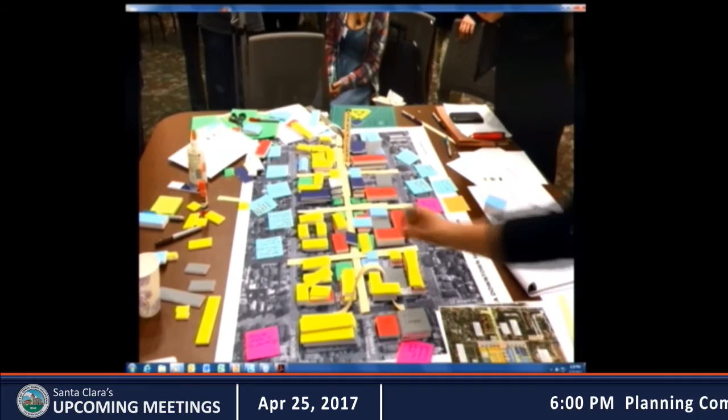I think with what Casey and I and our group feel is that this is an old soul here, and the footprint is already there. I think we bring it up to date, but we take a little bit from the 1860s, back from the history of this city as one of the oldest in California, with history of every decade. We sprinkle it in a little bit, and that's what makes it unique. That's the key. This is Santa Clara, and I think we could all wrap our arms around this and really move forward.

So you get just a little taste. But what basically was happening is the pieces are movable, right? There's paper, scissors, everything. So people took advantage of that to help construct what they were talking about or write notes. They have pads to write notes on, to do whatever it takes to say, here's what we're thinking. So we took all of that and started to craft a preferred plan, which is on the tables.

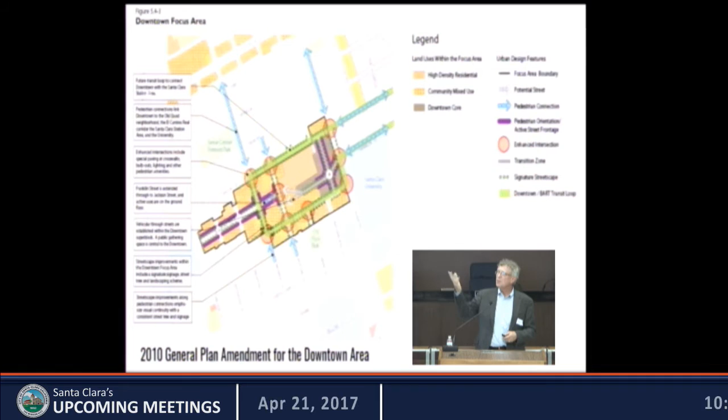So before we get into reviewing that plan, I wanted to look back a little bit at a couple of other items which also help inform what we're all doing. The first is that the general plan and its update from 2010, or amendment, shows what has been coming forth, which is to make Franklin into some sort of main street that ties in with the university. That came up again and again.

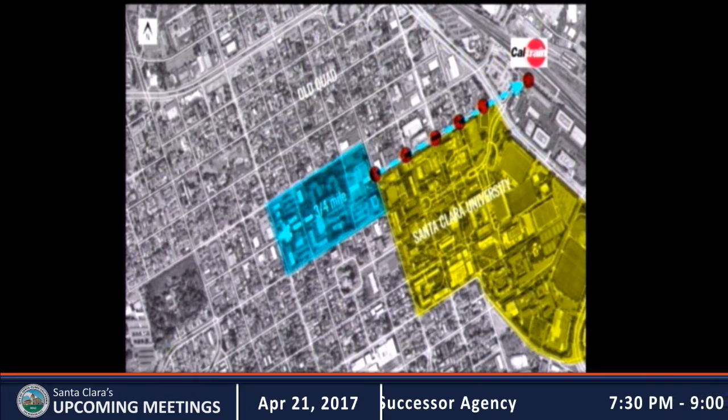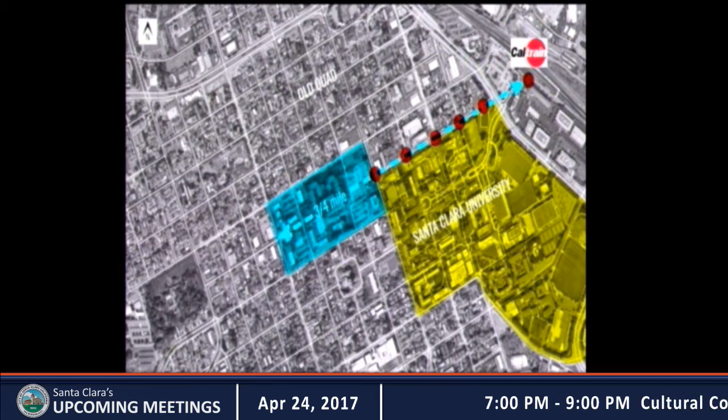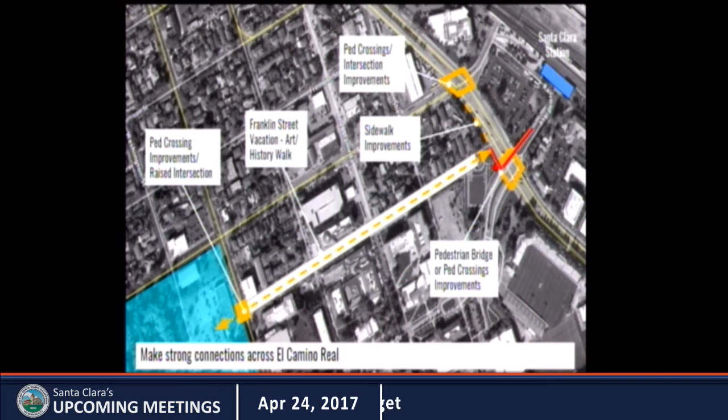So when we look at it in a bigger sense, all the way from the Caltrain and future BART station to Monroe is about three-quarters of a mile, a nice walkable distance, making the Santa Clara University and the super block of downtown, as it's been called, from Lafayette to Monroe, work together. There are certain things happening all the way from Lafayette with the university heading over to El Camino Real and to the transit center.

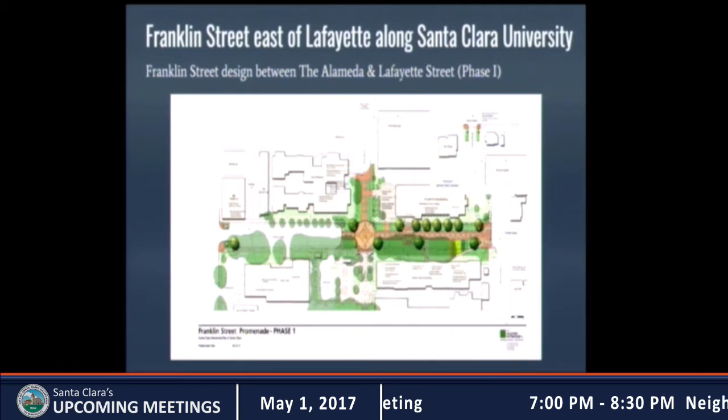So along the way, since we started, there's been some work by the university on Franklin Street improvements. Here the promenade is shown, and the street on the far right is Alviso, and the one in the middle is Alameda. The first phase of this, which I understand might be constructed starting this summer, is that first block, and then the second phase would go to Lafayette from the Alameda.

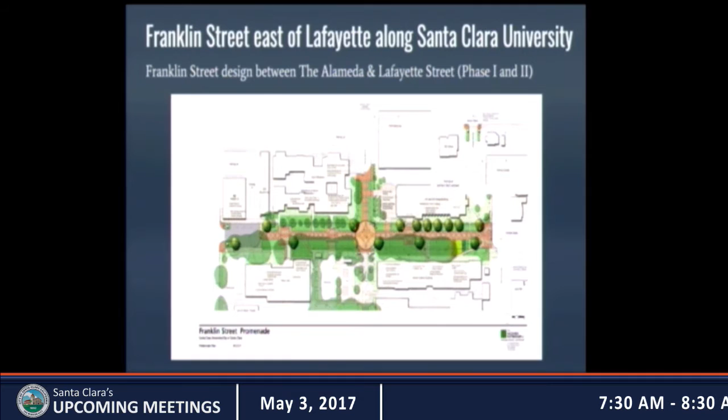So you can see there's a lot of improvements planned or thought about, including intersections and even a history idea at the intersections, and then some sort of gateway at Lafayette, sort of welcoming you in and out from downtown as part of the downtown. This was actually talked about a lot in some of the first meetings and kept being reiterated in recent meetings. And of course, there are also projects underway.

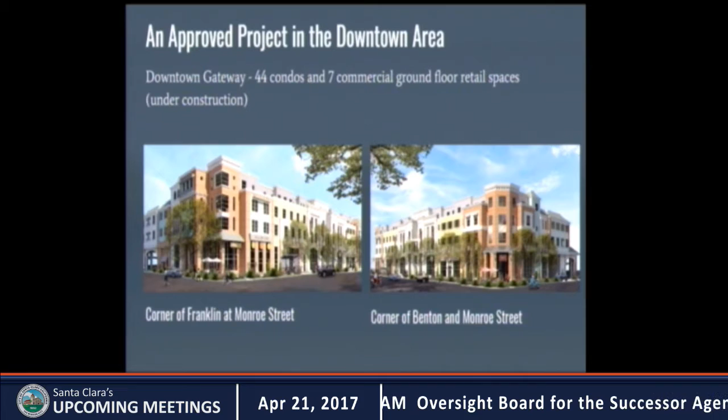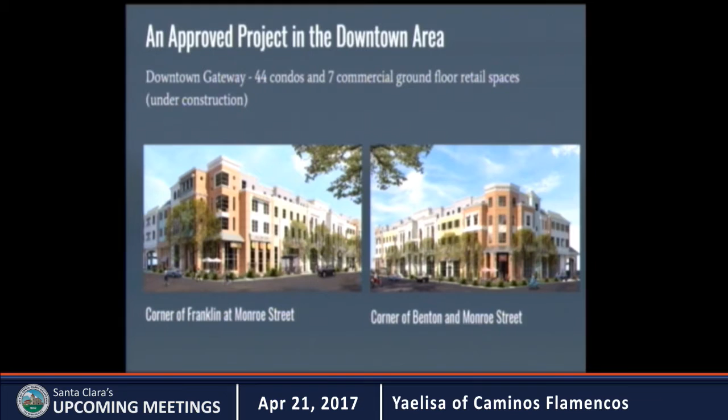Here's the downtown gateway at the corner of Franklin and Monroe, and a picture from Monroe Street at that corner. So you can see there are already things happening, and what's important about a plan like this is nothing stops. We can make it a work in progress, and in order to see what's next, one of the things that comes out of something like tonight is what kind of phasing there should be if this is the preferred plan, and what should be the next steps. So that's what we'll do at the very end.

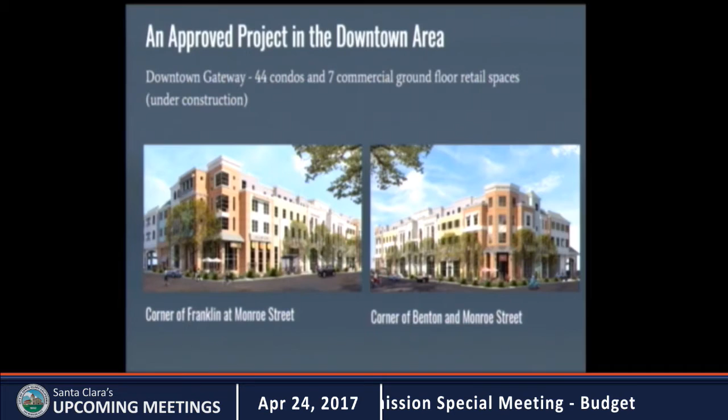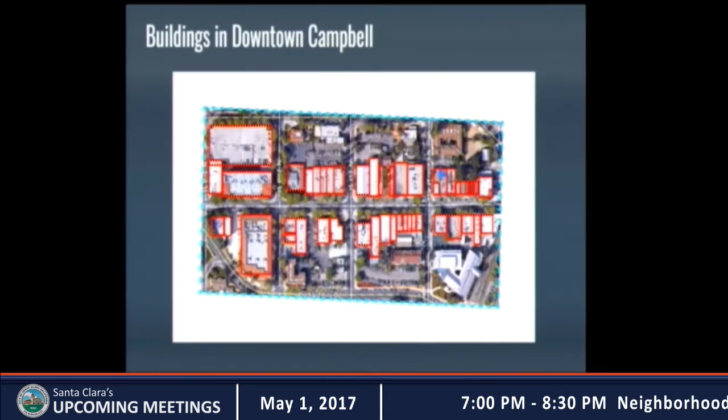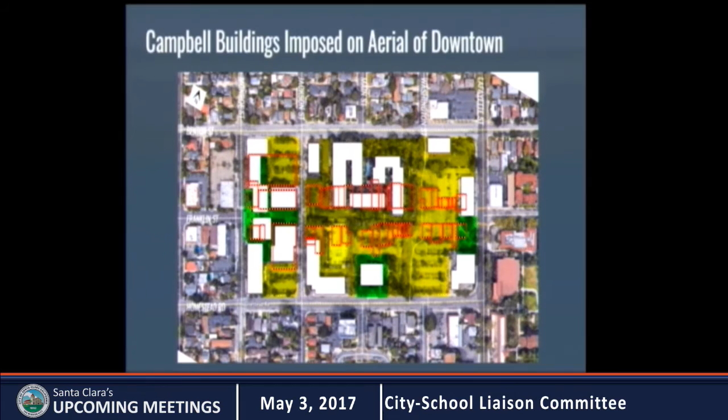We were also looking at, in the past, and you may have seen this before since I presented it a few times ago, downtown Campbell as an example of another downtown that has a nice grain of urban pattern. When you look at the buildings in downtown Campbell and outline them, then cut and paste those outlines right onto the super block, you'll see them in red. The pattern actually fits quite nicely on the super block. This was kind of an amazing coincidence, or maybe it's not. This is actually a pattern that used to be there and still exists in Campbell, and if we were able to compare them, you'd see you could fit it if you wanted to bring it back.

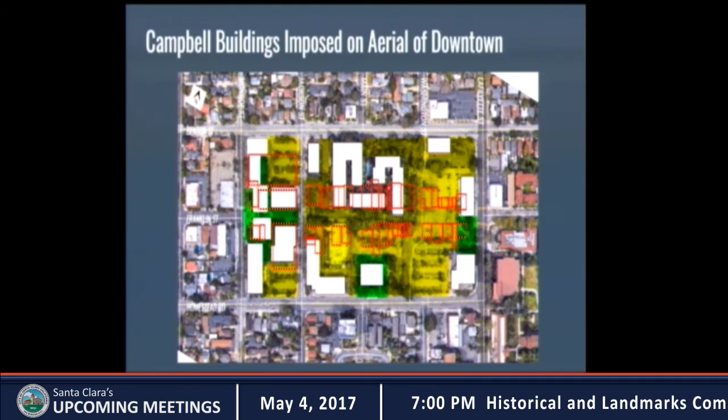So some of the principles we've gathered from our conversations in past workshops, and there's been quite a few - this is number 7. There's defining a flexible plan boundary, promoting the local flavor and unique vibe of this place, respecting the historical heritage and character, incorporating a pedestrian-oriented spine along Franklin Street, and addressing flexibility in uses, densities, and site relationships. These are all big topics that came up time and time again, and we can keep talking about how they're implemented in this plan and the best way to make these things a reality.

Oh, and there's 5 more: maximizing the collaboration among the city, Santa Clara University, and other stakeholders; including a diversity of uses that will activate downtown; promoting the arts and the arts community as a theme; enhancing transit, pedestrian and bicycle access and other forms of access; and promoting a balanced scale of development that achieves a density for success. So today we're going to have a chance to explore some of these principles, and maybe they've shifted a little bit, but we'll talk about what these mean to us now.

At our last meeting, we had looked at 3 alternatives: Alternative A that focused on infill, Alternative B that looked at a meandering Main Street, and Alternative C that's restoring the downtown grid. All 3 of these alternatives are at every table, so they're just for reference of what we had worked on in the past. But I wanted to go over them and show you.

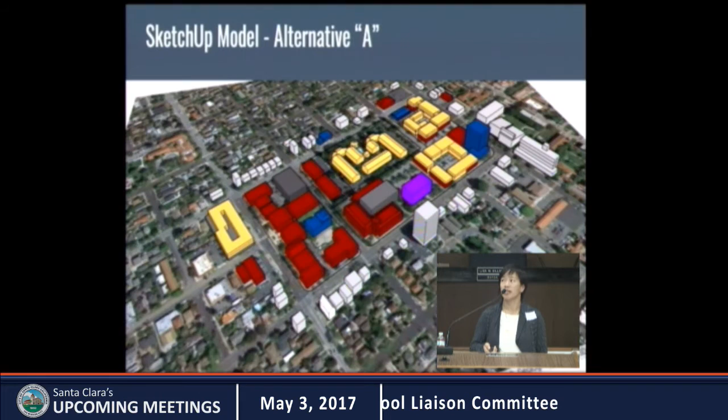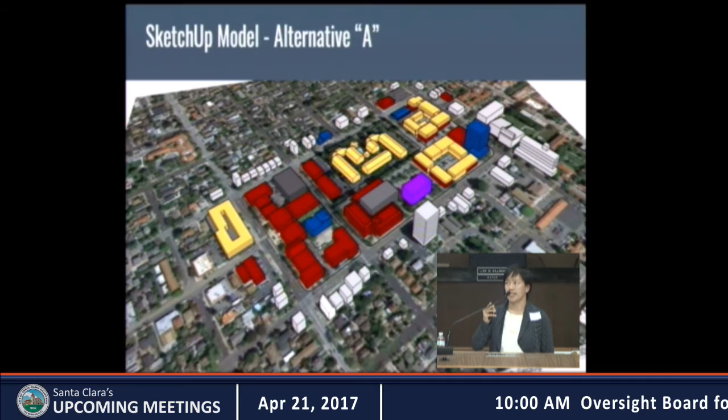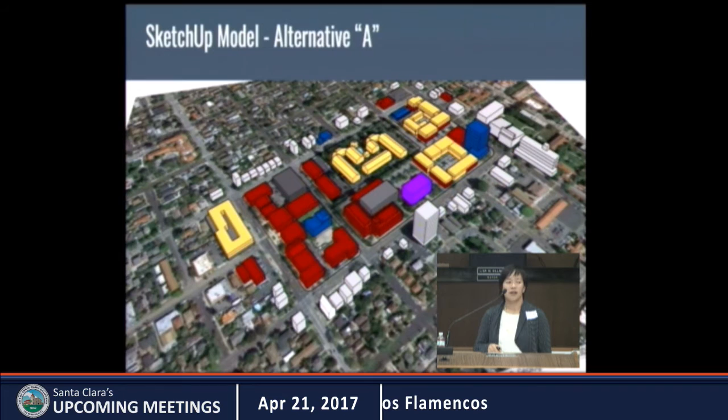We made 3-dimensional models of these so we can see how they work. With Alternative A, really focusing on infill, we realized some of the larger parcels needed to be addressed - there are some existing parcels that are either city-owned, though most of them are privately owned. So this is the most conservative approach, looking at the infill of really the areas along Lafayette. In model form, this is what it looked like at the discussion in February.

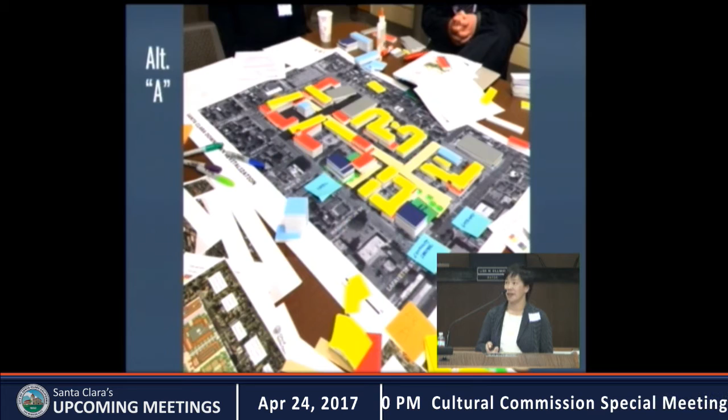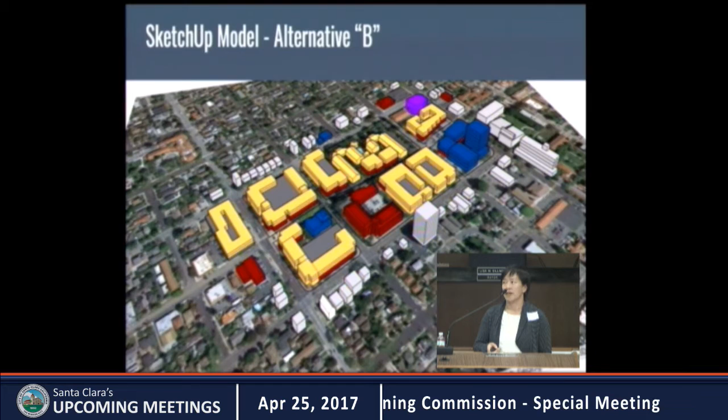For Alternative B, this looked at trying to get Franklin Street to go through, maybe not in a straight manner but as a meandering curve, really to respect some of the existing buildings that are still there. This is what it looked like when we were working on it in February.

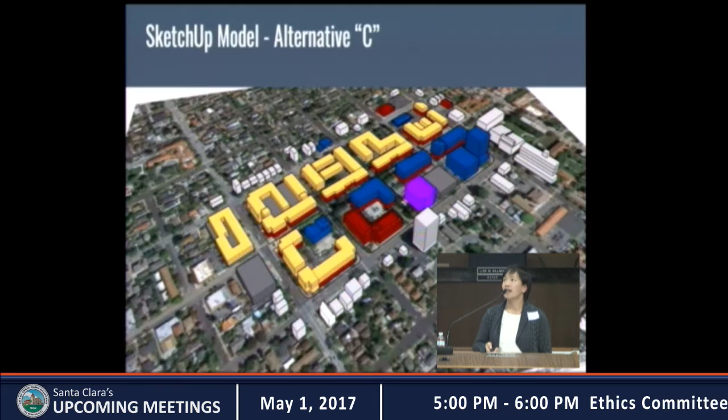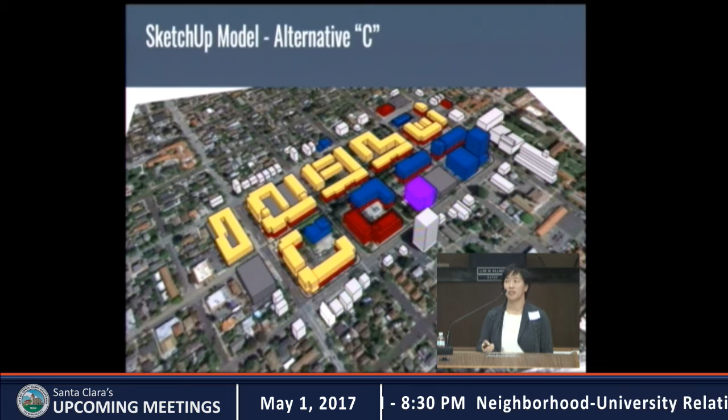And Alternative C, which was the grand vision, is really reinstating Franklin Street all the way through, reinstating the grid and connecting all those streets, creating these blocks as they once were. Now, to achieve this takes a little more effort than the infill, but we'll talk about that as well. This really serves as a grander vision, and that's actually what led - it seemed like people were very into it. We had the most discussion about this in February, and this is what's leading to our preferred plan as of now.

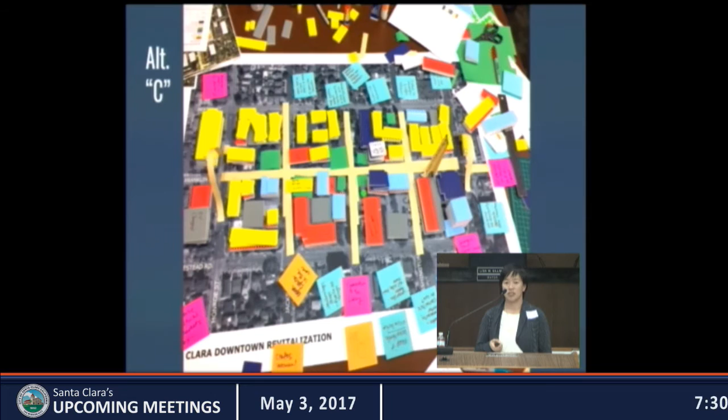So when we talk today, I want you to consider the three alternatives we looked at before. Maybe it's time to reconsider some of those, maybe it's not. But we would like to ask you the following questions, especially about this preferred plan: Which elements and ideas illustrated in the alternatives and in the preferred plan did you like, and which ones didn't you like? What kind of street or connection should Franklin Street be? Should it just be a path between all the parcels that exist? Should it be a real street? Should it be a meandering street? Should it be a straight street?

These are all questions that we want some feedback on. What uses and activities should downtown Santa Clara offer? This is something we've started talking about from the very beginning, but we want to know again what kind of place you want downtown Santa Clara to be, and what kind of new buildings and open spaces should be here.

What kind of forms are they, and what kind of places are they like? If you attended in February, we had a lot of different examples of other places we looked at around the Bay Area that served as examples, and we welcome you to continue to bring up those examples as far as describing what you like and perhaps what you don't like as well. So with that, I'm going to turn this over to Heidi, and she's going to go over the rest.

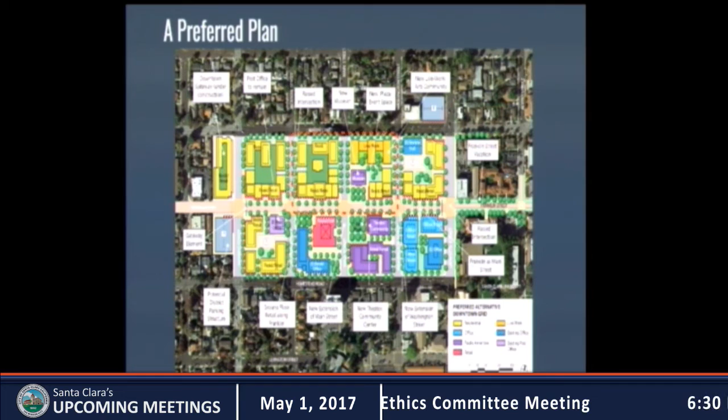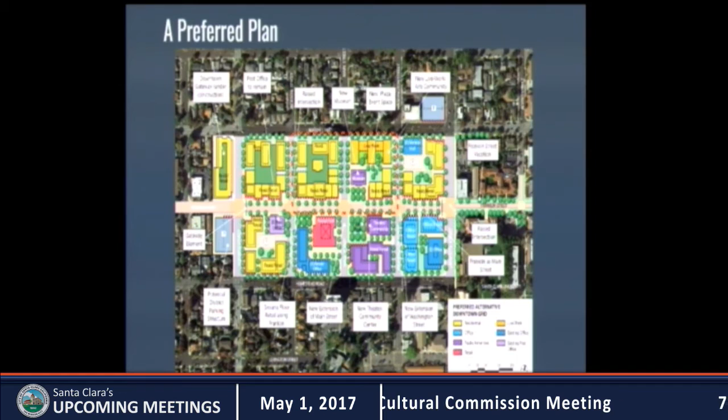So we established a grid. You can see that we extended Main Street and Washington Street, going all the way through, and most importantly, Franklin Street becomes the key piece to this entire plan. Franklin should be pedestrian-oriented, so it still has some traffic allowed on it, but the way you treat the street should definitely be oriented towards pedestrians, and that could be done through pavement - it could be almost like a visual extension of what the university is doing with their Franklin Street part, so it visually continues.

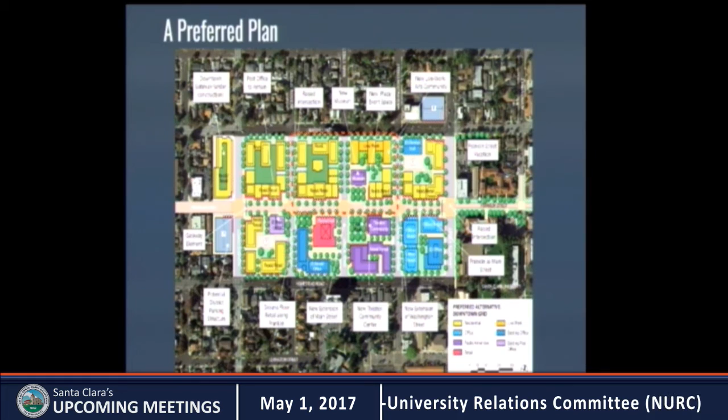And then we have - we put this right here - the new theater together with a new hotel, a central plaza where events could happen.

We kept the remaining office building, we kept the buildings including Benton Hall, and tried to reestablish what used to be Main Street with retail on the ground floor and residential on top, and there would be more residential along the edges right here.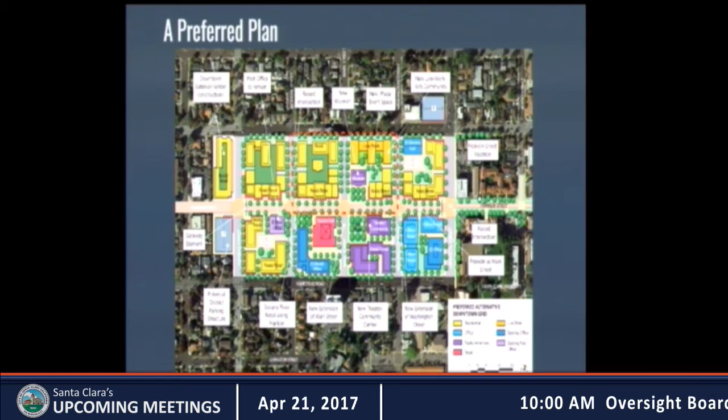Very critical too, which was a great idea that came up for the first time last time, was a market hall. Instead of maybe just a conventional grocery, maybe it's something that brings together different types of food places and maybe some small grocery place.

And that could also be the central location right on Main Street. So this is what you have now. And we showed this in the plan, so you have a better way of comparing it. So you see there's plenty of parking right now.

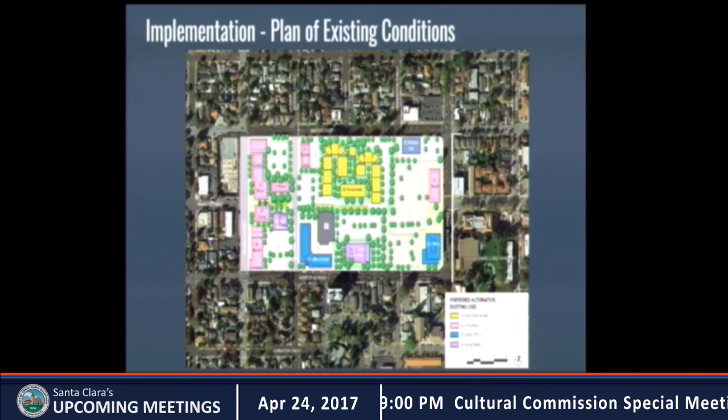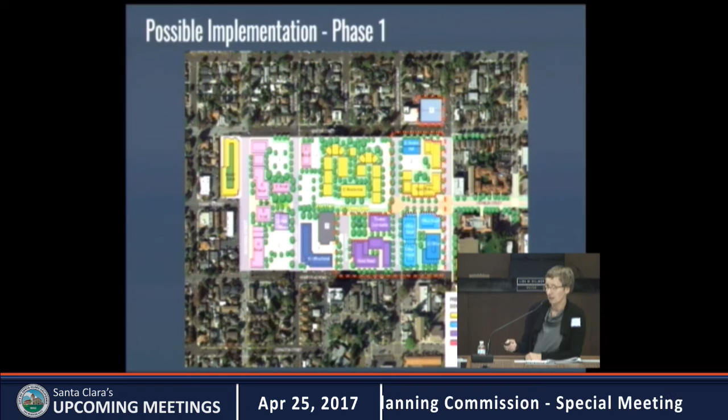And we thought about how could you, if you were going with a plan like this, how could you possibly phase it? Of course, there's a lot of implications, ownership challenges that we have to deal with. But if we would like to make that happen, how could that work?

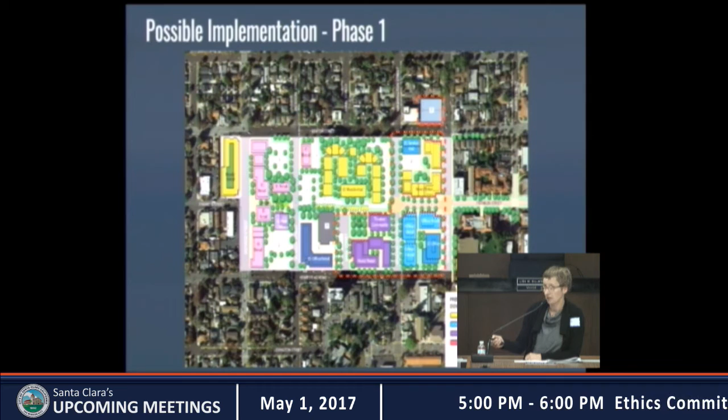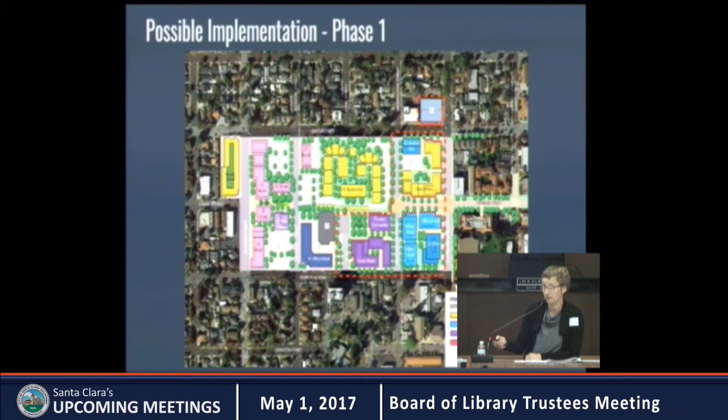We thought the first phase, probably the easiest, would be to do—because the university is already doing their part here—is to fill in what's currently a parking lot with the new mixed-use project right here, potentially the community center and the hotel. Just start on this side, on the east side, right at Lafayette.

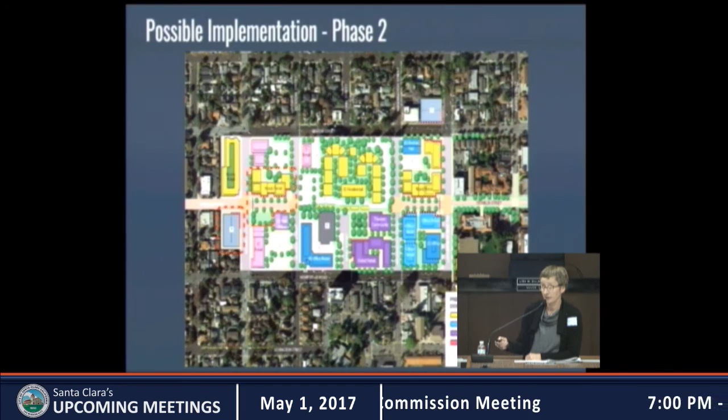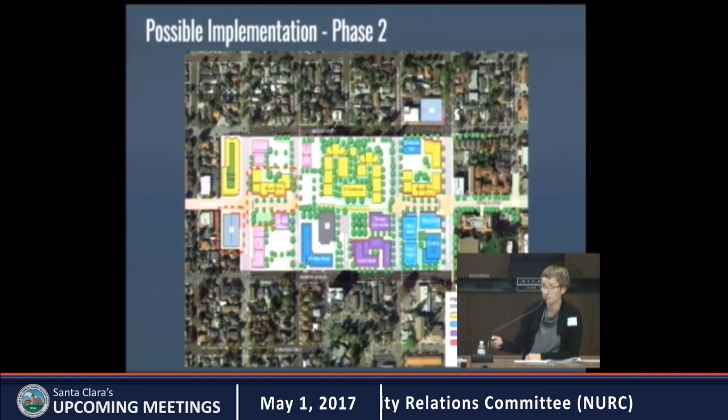Then the next phase could start Franklin Street right here, just this portion, and to Washington extension. And then we come in from the other side. We still keep this block pretty much untouched in the next phase. So we're kind of slowly working our way towards making Franklin a complete street.

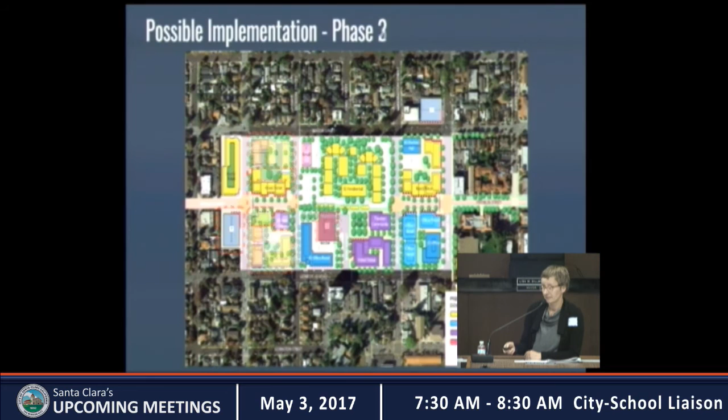Then the next phase could be just filling in those blocks and bringing the market hall, which could already get served from Homestead Road, even though Franklin might not go all the way through yet.

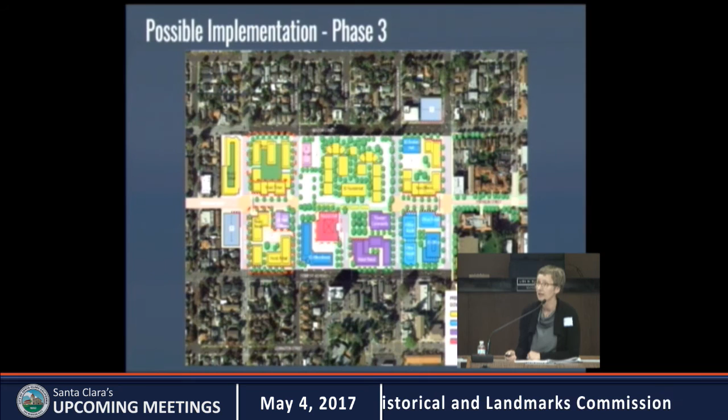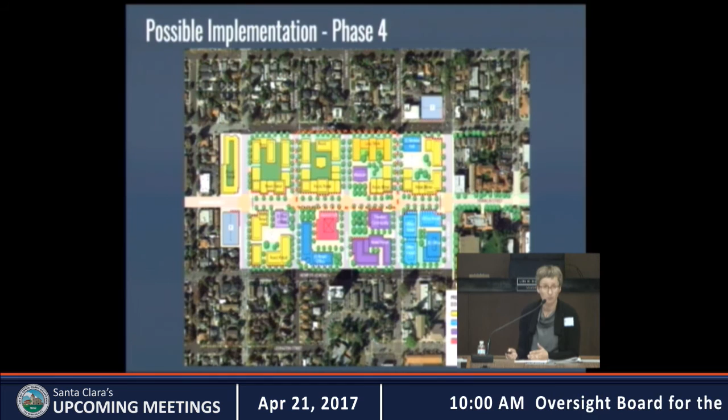And then the last phase would really be completing the last two blocks where we currently have the apartment buildings, and replace those over time. So we would end up with, hopefully, the Main Street that you had envisioned.

So again, just summarizing, what are the key things to a vibrant downtown that can become a destination? Definitely an open space for gathering and events, a street that can be the Main Street, make it very pedestrian friendly, and allow for a range of different uses and events, so day and night uses in the downtown.

And then, of course, cultural facilities like the community center are very important. There could be a collaboration between a theater and a community center, depending on what size Santa Clara really needs.